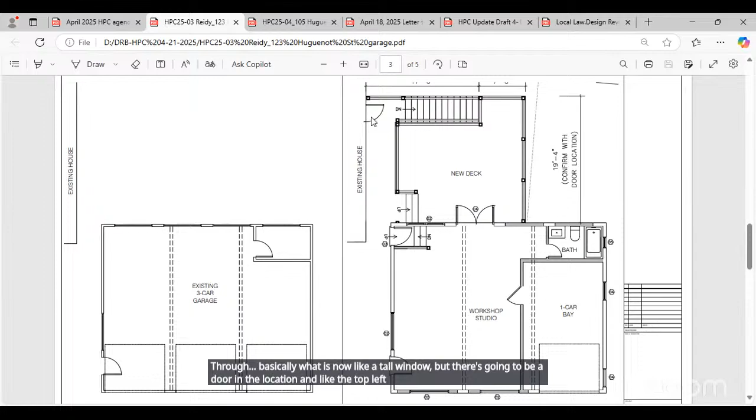Sure, where do you want to start, Shane? Well, I'll get on the side of the table. There's several design things from last month's consultation, but just to bring Tom up to speed: basically there are two phases to the proposed work. There's the new deck on the rear, heavily inspired by the neighboring Stevens deck, similar in detail but not the exact same. It connects to the main house through what is now a tall window, but there's going to be a door in that location, in the top left corner there. That's one aspect of the project, and then there's going to be essentially a renovation of the garage.

More or less, my parents don't need the 3 separate car bays. My dad's a carpenter, he wants to do work on the house, and he wants more or less a workshop.

He wants to cordon off one bay of the garage and have the rest as a workshop studio. Right now, if you look at the plan, there's an existing room in the corner, and he'd like to put a bathroom in there if possible, just so he can wash off before heading back into the main house.

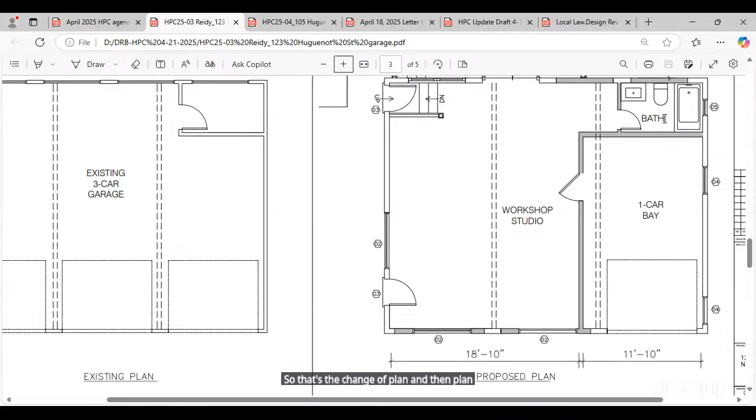That's the change in plan. On the outside, scrolling down to the elevations, there's the addition of some shed dormers in the roof to break it up. The existing front elevation has one original door to the north, which is on the right side of the east elevation, and then two replacement garage doors that match each other but don't match the original door.

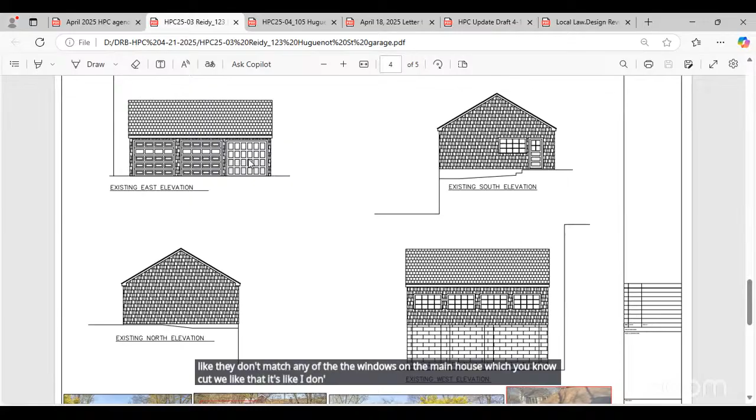There's also a series of rectangular windows with a more industrial look that don't match any of the windows on the main house—which we actually like. It makes the garage a little more interesting, so we're picking up on that window style and theme.

If you go down to the proposed elevations, we're essentially blocking in the garage doors to the south and in the middle of the front elevation, and adding some new windows to match. All the windows are being replaced, and they more or less match the existing ones, although the existing are single pane and these will be double pane Andersen 400 windows. In terms of size, geometry of the divided lights, and details, they're the closest match we could find.

I think they match pretty well, and they're awning type windows. There's also that new door in the corner of the garage, matching the existing door on the right side of the south elevation. So it's an existing style of door, but we're replacing it with a new one that matches the original.

Where the cursor is, that's a new door opening matching the existing door panel we're replacing. You can see the change in grade—the doors aren't at the same level. That's the existing grade, not natural, and there are two steps down, visible in section, that go to the rear of the garage.

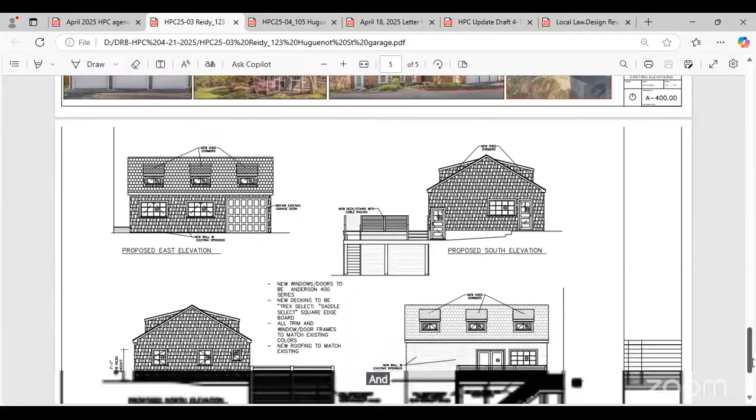Those proposed shed dormers will be on the front and back, again just to break up the roof a little without doing anything too overly designed or ornate. It's still a garage, so it should still read as a garage, but we wanted to dress it up a bit and make it nicer, and also bring some light into the space since it's going to be used as a garage workshop.

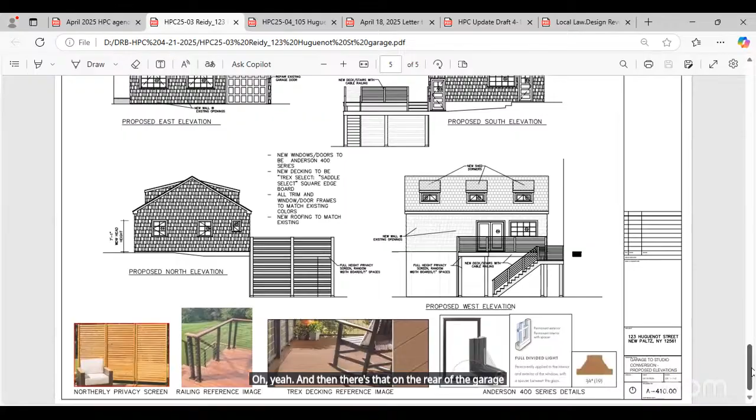And then on the rear of the garage, there would be access to the deck from the workshop space, so there's a sliding door and a new window. I think there's actually a window in that existing location right now, to the right of the sliding glass doors. We're filling in two windows on the rear of the garage, essentially moving those windows to the front. That's kind of the idea, but they'll all be new windows. That's everything.

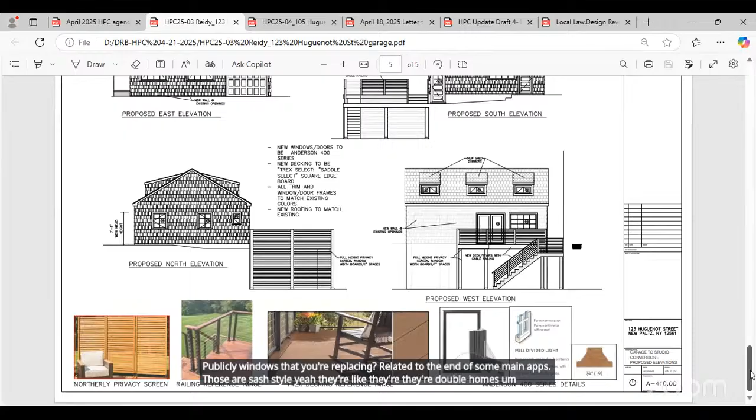How do the windows you're replacing relate to the windows on the main house? Those are sash style, aren't they? Yeah, they're double hungs. If you go back up you can see they're double hungs without any divided lights, so they don't really relate - they're different. The windows have a different language on the garage, which makes sense, since it's a different space, a different building, built at a different time.

When we were designing this, we considered putting some double hungs on the front of the garage, but it immediately looked weird because the garage isn't really becoming a finished space that's part of the house. So to continue any of the details of the main house felt weird. We just focused on the existing details in the garage that we wanted to move forward and lean into for the design, and continue with that design language.

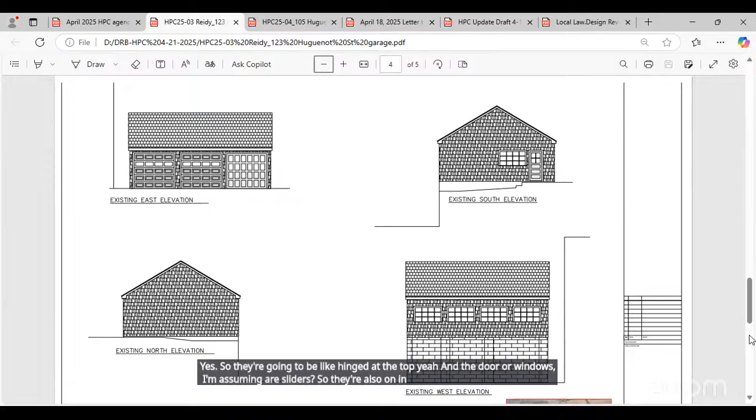And you mentioned the windows are going to be awning style. Yes, they'll be hinged at the top. The dormer windows, I'm assuming, are sliders or casements? They're also awning windows. Because they're not that large, in terms of getting maximum airflow... I'm not sure how often they'll be used since they're so high up, and we're not planning on putting automatic openers or anything. It was more so to match the existing awning windows and have a similar geometry for the divided lights - just keep the same details.

Because I was looking at the Anderson picture windows, and they had different size frames than the awning windows. So I figured even if these are just set in place and never opened, the details will match more exactly with the rest of the windows on the building.

Thanks very much. Mr. Reidy Senior, is there anything you wanted to add? No, I think Shane described it very well, better than I would. We're just excited about moving forward and making that garage look more aesthetically pleasing from the road also, you know.

Is there any HVAC plan, like a mini split? No, actually, not as of right now - it's a good question, not part of this application. Although, I mean, now would be the time. I guess there's a good location for the condensers under the deck, because that's going to have a privacy panel.

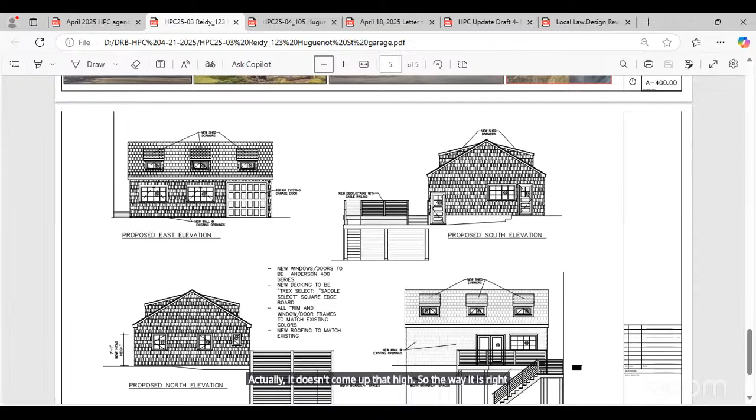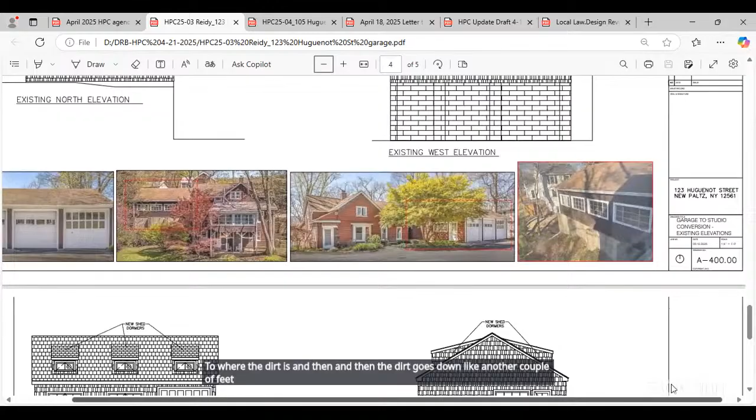Right now, where that deck is, the dirt comes almost all the way up. It actually doesn't come up that high - I think you could just hang the deck on those built-in piers, or maybe just bolt in a bracket there, and hang it off there, because the dirt comes up not even halfway. I think that drop is like 10'6" or 11 feet to where the dirt is, and then the dirt goes down another couple of feet. It's not at the same grade all the way along the back.

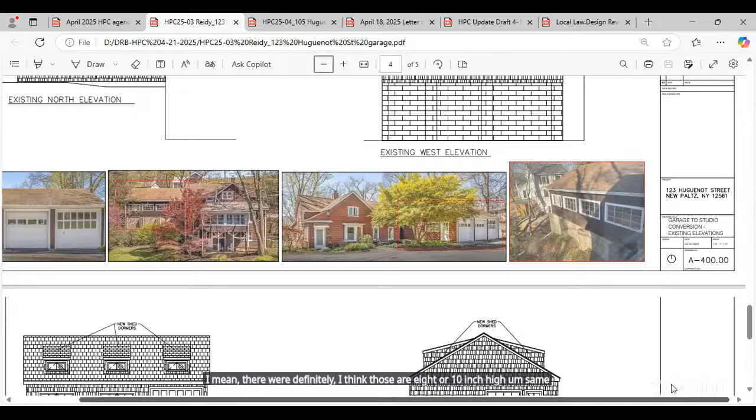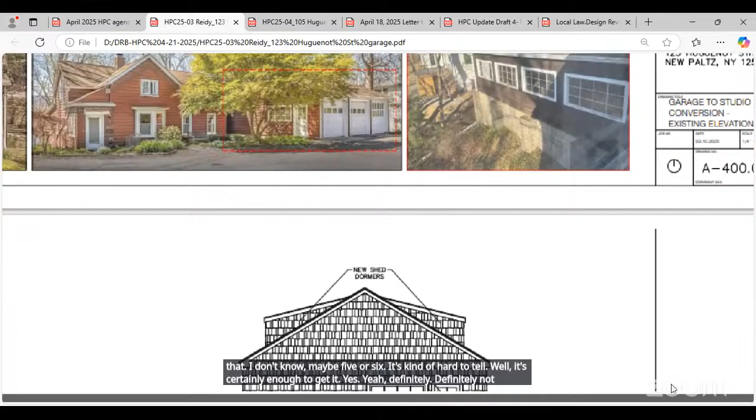There's a pretty decent amount of height of just the bare CMU wall - those are 8 or 10 inch high CMU blocks, so if you count the courses, maybe it's at least 7 or 8 feet for the most part. Even where the grade comes up lowest, maybe 5 or 6 feet. It's hard to tell, but it's certainly enough - definitely enough to tuck a few condensers, if that's something you'd want.

Yeah, but it didn't make it to the drawings. I guess we gotta take a look at it, but I guess that's where it would go. Maybe we revise that for the public hearing.

Yeah, it was just in the application, almost just pure curiosity, but I find it useful. Even if you, yeah, just plan for it for some eventual need. Something like if you're pouring footers, then pour a pad in anticipation, because it would be pennies compared to what it would take to do it later. Yeah, that's true. So maybe we update the application right after this and update the drawing.

Because the next step would be setting a public hearing, right? Yeah, for the next one. That's probably what will happen.

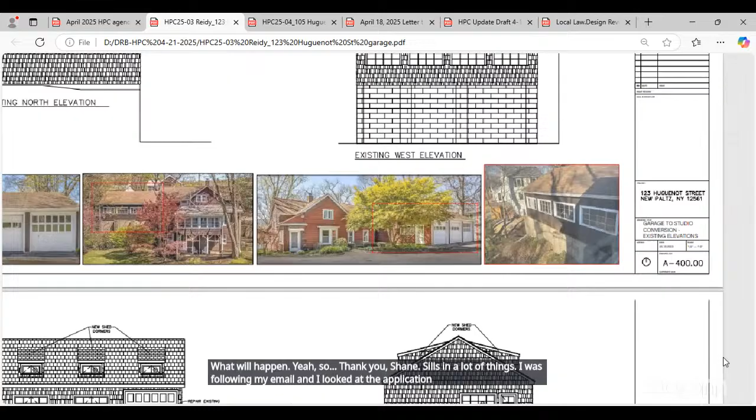Thank you, Shane. That- yeah, no problem. Fills in a lot of things. I was following by email and I looked at the application, but that was a great narrative. Yeah, no problem. Does anybody have any questions or comments?

Well, looks good. It's great. And the shingling is gonna be natural or?

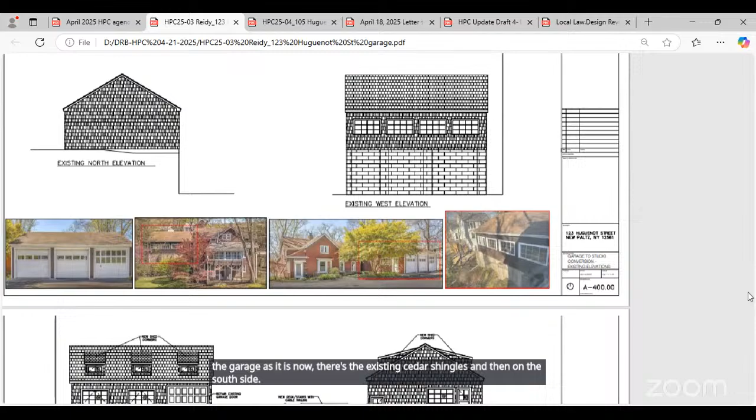Yeah, so actually that's something I forgot to mention. Right now there's aluminum siding covering the existing cedar shingles. So on 3 sides of the garage as it is now, there's the existing cedar shingles, and on the south side, you can kind of see in that center photo, the south side of the garage has the aluminum siding that the house has. So the plan is to take that off and restore the existing cedar siding, depending on what shape it's in, replace it as necessary or just paint it.

The cedar siding around the rest of the garage is in decent enough shape, but I think we're gonna have to replace a decent amount anyway, or infill where we're filling the 2 garage doors, as well as those 2 windows on the rear. So that's gonna be new cedar shingles. Maybe at that point, just replace the whole garage this way, so it's all the same age and same condition.

I guess you'll know when you take the siding off. Yeah, we put a different kind of siding off our house some years ago, and at that point it would have been about 100-year-old cedar, and it's mostly not replaced, here and there. So you may have a pleasant surprise waiting for you. Have you taken any of that off? No, I haven't taken any of it off. Yeah, so I guess we'll find out.

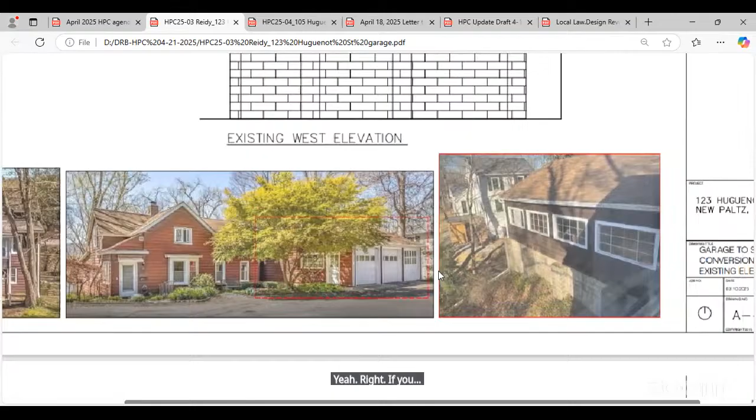Terrific, so we've got our vote, 4-0, for the May 12th public hearing.

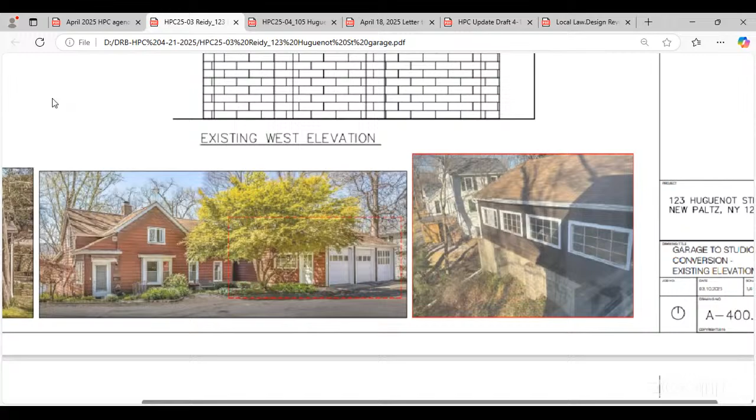Everybody, let's go to our next item, which is Mr. Hardeep Singh at 105 Huguenot Street, HPC 2504. Mr. Singh, would you like to come on up to the table?

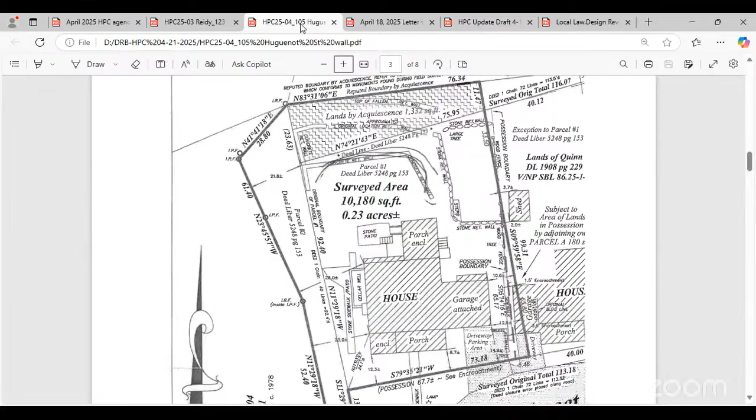Oh hold on, we have that, hold on a second, hold on. Need help? Again, welcome, thank you for coming in person. It's so much nicer to talk face to face.

If it's all right, I'll characterize what Camille and I observed when we did a site visit 10 days ago or so. Having received the application from the building department, Mr. Singh and I had a couple of emails back and forth just to better understand the condition of the wall. Camille and I made a visit to the site that you're seeing here and confirmed definitely that the wall is degraded, particularly on the left side of what you're seeing. We also carefully peered over the edge of the wall to see that there's a supporting wall. I don't know if we have a photo that shows that.

That is quite low, yeah. This will give a better sense - it's about a 10-degree lean, which is starting to be dangerous, I think. The natural stone is sitting on what appears to be a poured or cinder block base, about 4 or 5 feet down. Does that sound about right? So it's very uneven - when we had the person who wants to help us with the wall, he showed that in some places it's 3 feet and some places it's 5 feet, so it's kind of uneven.

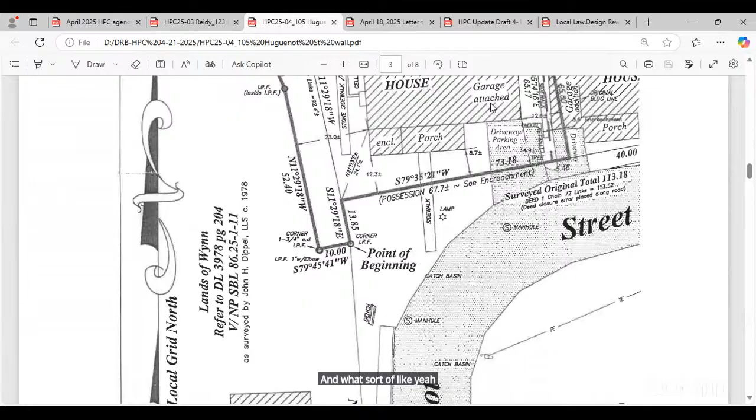Okay, please see the site plan. I was curious to just remember how much your land extends past the wall. Yes, and what I should see. Yeah, and I can go up a little bit, I guess. Just that we... yeah.

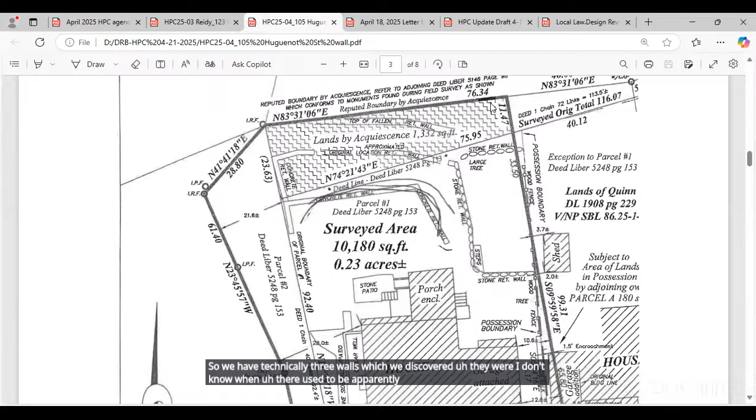So we have technically 3 walls, which we discovered. There used to be apparently 3 steps. So there is the first wall which you are looking at, which we are trying to repair. Then another 6 feet down, there is a lower level, another 6 feet, another wall. And then there is another wall, which usually most of the time goes underwater. The rain comes in. So there are 3 steps.

After the 3rd wall is where the property ends. And the current retaining wall is much closer to the house, like the pen marks. So that's what I did, because I was trying to show someone the curve that the contractor is saying to do for the wall.

That's wonderful, that's better than I hoped that you've got. Yes, plenty of room space. Yes, yeah, I mean we have.

We thought about at one time, if we are doing the retaining wall, rather than just that, we can reclaim a little bit more of a yard, since our yard is not very big as you've seen. But it becomes a very enormous project to fill that much stone and build more land. And it always settles, you'll end up doing it again.

And the level that you find first, that's... no, just on the proposal that I got from a few people to do the current wall, it's quite enormous, so I don't know.

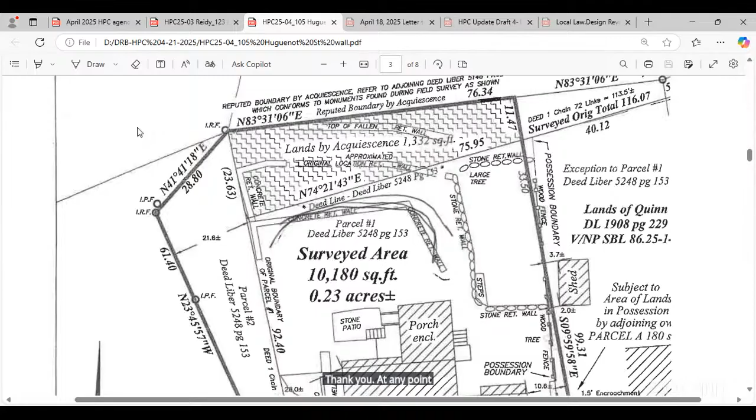Just one last question - what's the process now? Do I have to go to the...? Valerie will communicate our decision tonight to the village, to the building department, and from that point you should be able to get a permit, and just follow up with the building department. Great, thank you. If at any point we can help, call on us internally at this point. Okay, have a good one. Thank you.

Thank you, everybody. Let us move on to the design review of the evening. We're going to discuss 147 through 159 and 151 North Chestnut Street, Westview Development LLC, with some updates on the project from the planning board.

Will there be any screen sharing? Will Carol want to put images up, or should we use the one you sent? Carol, I'll leave that to you. I can share the screen. Okay, let me stop sharing then, it's all yours. Okay, that would be great.

I believe it was October that we saw each other, and issued a positive, generally positive, but also very preliminary design review report.

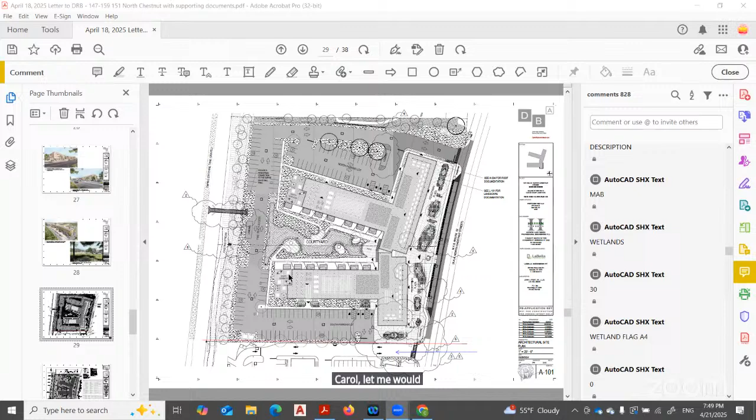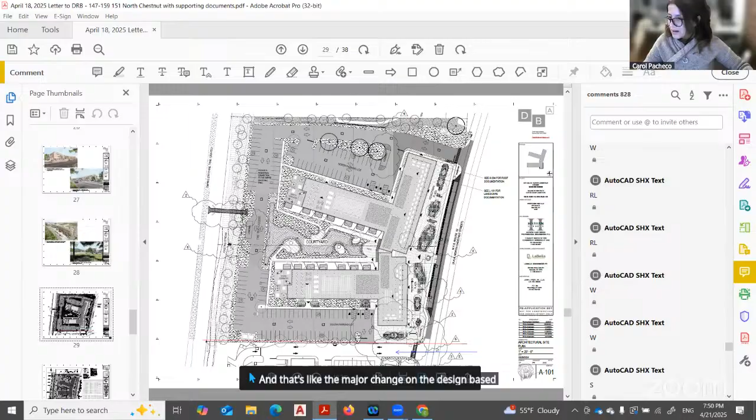Carol, would you like to narrate through? Yeah. So the last time we presented to you was last October. Since then, we got a neg dec on SEQRA, and we also got the side yard setback variance for the north and south side. That's the major change on the design based, to obtain that reduction on the setback. We elongated that south portion of the building, and we also have a shared driveway with the Agway project now.

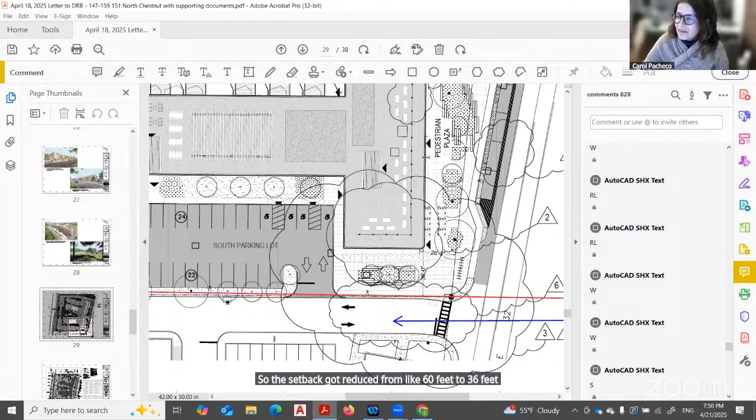So the setback got reduced from 60 feet to 36 feet, so that facade was elongated by 24 feet. As you can see, we have kept the pedestrian plaza, and now it wraps nicely to that corner. With those changes, of course, the layout got updated as well. Let me share that.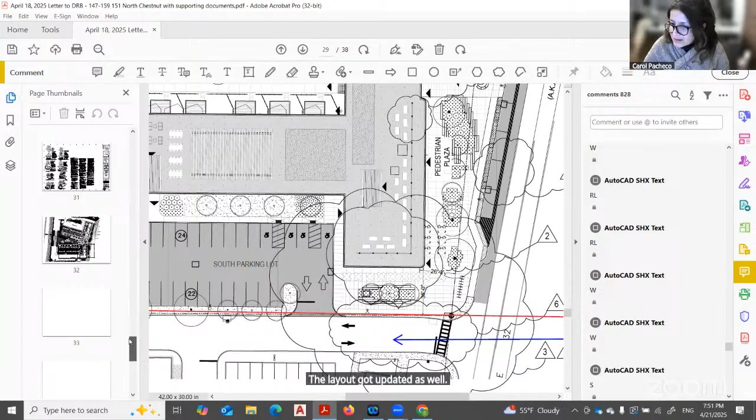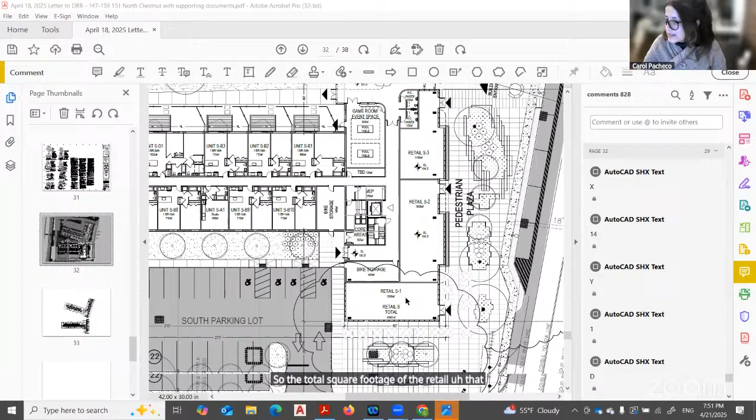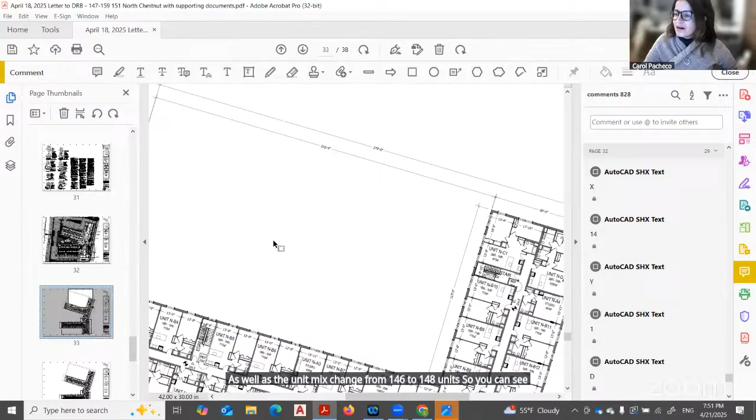So the total square footage of the retail got augmented from 7,500 to 8,700 square feet, as well as the unit mix change from 146 to 148 units. You can see those updated, highlighted on the plans as well. So one unit per floor we increased.

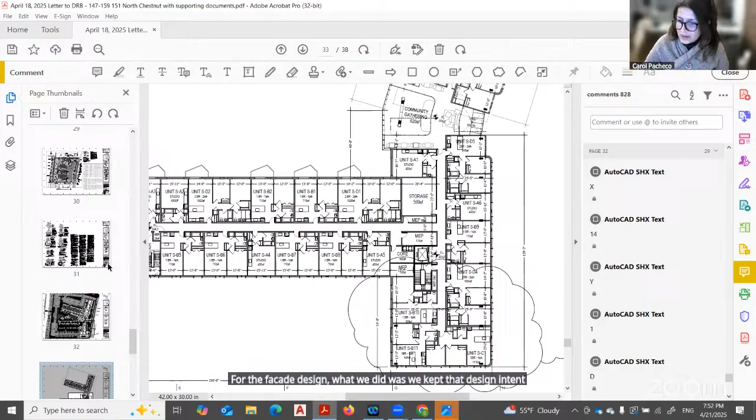For the facade design, what we did was we kept that design intent as we had before. Let me share those renderings. As you can see on the upper corner, this is the portion that got elongated, 24 feet. So two modules of this window units got augmented.

Also, concerning one of your comments about that railing, we set it back from the edge of the building further, and we decreased the height of that railing as well. We kept that rounded corner that the board also commented on positively. Those are the major changes on the architectural part.

Mike, if you want to chime in on the civil part. Site-wise, I think the last time you saw this, we had a very generic landscaping plan. That's been fully developed now, with specific species.

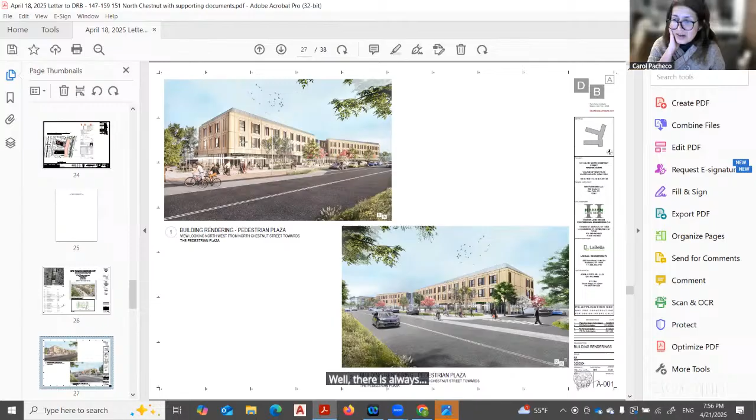Well, there is always a Hardie board, kind of like that had that wood tone. So we might go in that direction, but we always can give you a specific direction on that at a later date.

Yeah, I think that's pretty fundamental to what our job is, to make sure that the materials are of quality.

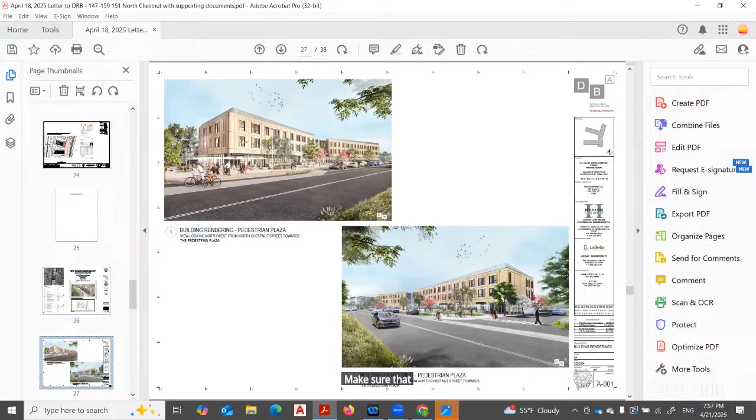Okay, so Carol, I heard Hardie board, but I missed the other option. No, that was, for now, that will be the main direction it may happen like that. But we can always go back, because we need feedback from the developer and the client. We can give you more detail at a later date. Sure, that would be great.

And I think it might be helpful to have a detailed section as well, once we get to that point and know what you're proposing. In October we had quite a discussion about making sure there was profile around those windows, and it looks like that has been followed. That's good. But we should definitely plan to circle back once you've done more thinking on that.

I don't necessarily have to run through my list. Do other people want to ask things, sort of take turns?

That was the main concern I had too. As I said in October, I think it's a really handsome design. Honestly, I really like it. I like just the details, the way the metal details and the wood details are distinct and come together nicely. And I like the kind of faceted look.

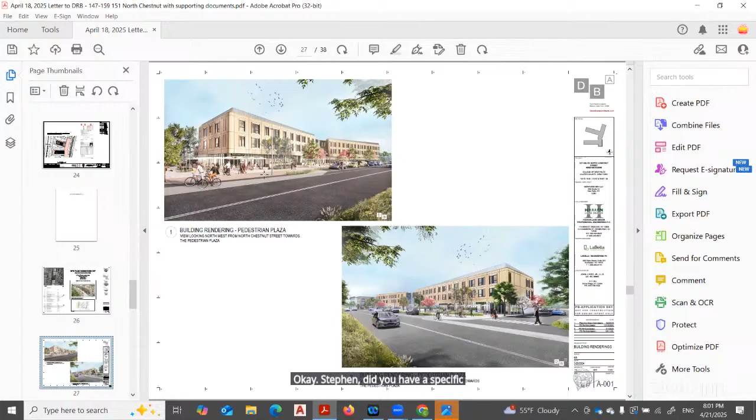There were comments from both the planning board and public during the public hearing about providing screening, mainly from parking, to the rail trail. It's robustly planted with evergreens along that stretch. I was seeing hackberry, red oak, eastern hornbeam, basswood, gray birch, yellow birch, and others.

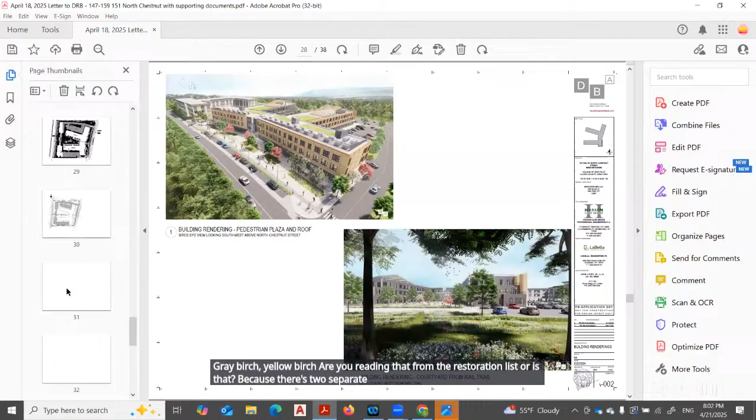Is that from the restoration list? Let's see, because there are two separate planting plans going on - there's a restoration plan which is more about habitat and stream. That may be exactly what's going on, but I'll definitely double check. I was reading it from page 30.

Is there a landscape architect you're working with? Yes. I don't want to push too much, but is there a possibility that when you get more finalized in the plan, he can do a presentation on landscaping? Thoughts? Absolutely, that'd be good.

That's a concern, if it helps - we've had this conversation with the Langley project next door, and it was a pretty easy conversation because everybody understood that the swing of headlights is, for some months of the year, going to be really intrusive. So we talked about possibly berming something up a couple of feet, and then, as Camilla said, not making everything deciduous.

But it could well be that I was misreading page 30 of that. I think that's something the neighbors on the other side of the rail trail are entitled to our scrutiny. And it sounds like you're quite on board. So let's plan at some later date to have a landscaping presentation that really addresses that issue. The rest looks robust and really thoughtful, as that does too, except we've got to keep thinking about the neighbors on the other side.

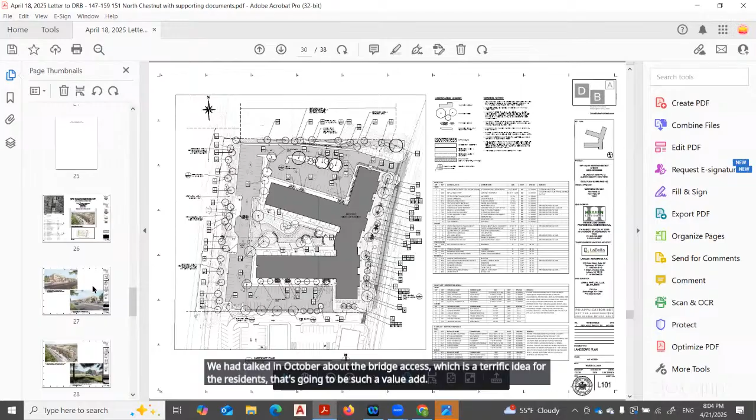We had talked in October about the bridge access, which is a terrific idea. For the residents, that's going to be such a value added for living there. It's a nice design also - a very nice design. You know, it's good in every way.

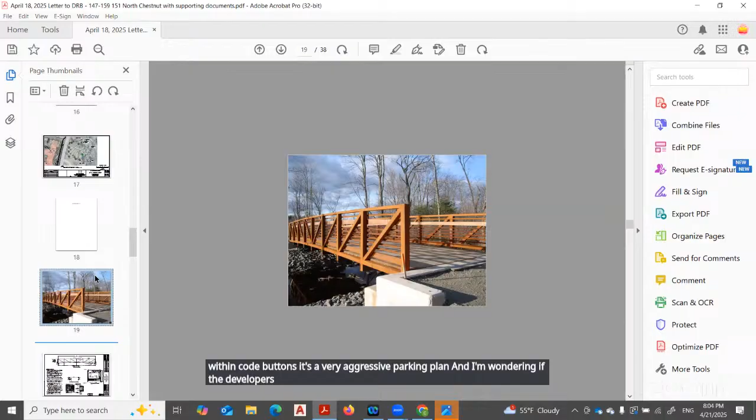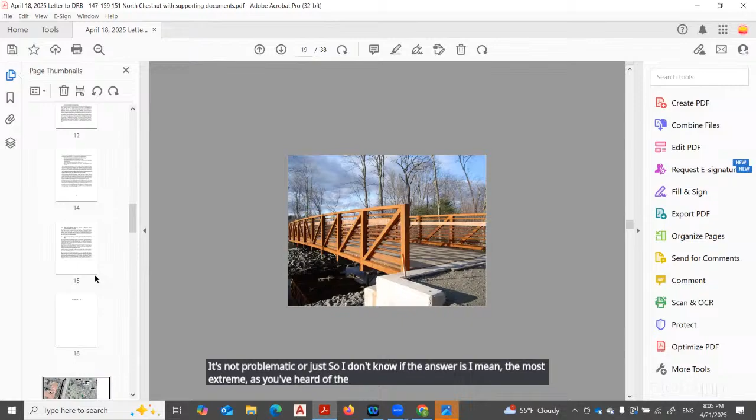But it did start me thinking - the parking is very, very tight. I know it's within code, but it's a very aggressive parking plan. I'm wondering if the developers are considering that non-residents might want to access the rail trail from that parking lot, which would exacerbate what's already found to be very tight, if not problematic, parking. So I don't know if the answer is - at the most extreme, as you heard at the planning board, reducing the number of small units to get maybe more families for the square footage - that's obviously a pretty big redesign.

There's also the possibility of numbered parking spots, where right now it's pretty clear you could just park anywhere, with aggressive language about being towed. I think it's a possibility with both of these projects that people may want to just come and park closer to the rail trail and hop on. Well, they're going to want to, and they're going to - that's most likely. Whether it's signed, if it's prohibited or not, or sort of key-gated.

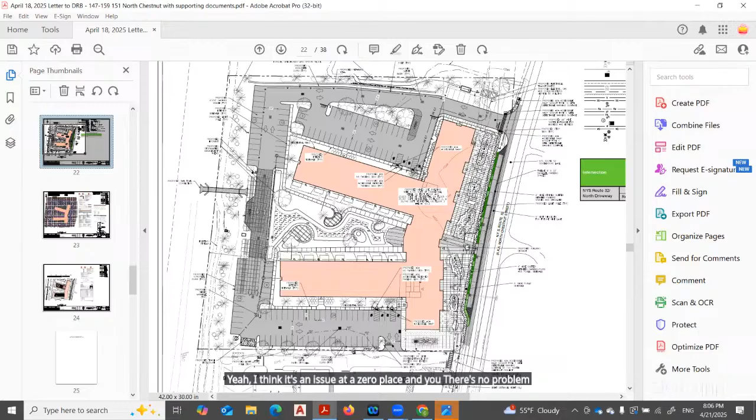That would be the option. I think it's an issue at Zero Place - you go there and there's no parking for tenants, it's full on nice days. Do they kind of assign parking at Zero Place? So it's understood during the day that that parking is eligible for the commercial. At Zero, the signs say 2-hour parking for the shops or guests, but people are parking long term.

Yeah, you're right. So that is kind of the warning sign - like what you said, people will try to do it. And it's really the planning board's purview about whether the parking ratio is workable or not. To me it looks aggressive to the point of dangerous, but that's not our purview.

Let me see if there's anything else I want to ask about. I think, with Shane, it's a very good design and coming along nicely. Oh, I'm sorry, I didn't ask about

the railing at the top of the building - so thank you for pulling that back. And the letter we received indicated that it would be steel or aluminum.

Is it going to be custom? I'll just say that the solution at Zero Place with the kind of modular, basically piping, was not a good solution. We had no oversight over that and would not have said yes to it, I don't think.

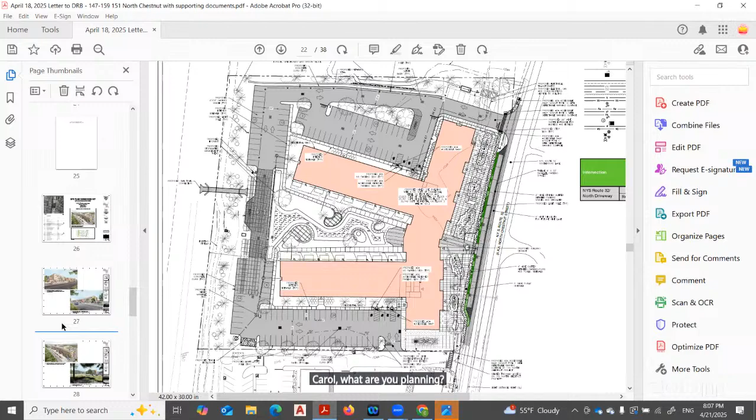Carol, what are you planning there? We are proposing aluminum or steel for the railing, but also consider that we have a parapet that is a continuation of that facade. So in a way you're not going to see the full height of the railing, it's pulled back, and it's also going to be covered by that extension of the parapet of the facade itself.

That would be an example of a detail we'd love to see at the next meeting. Let's go in tight on what you have planned there. Yeah, I think that same wall section that we asked them about. You pick up both of those.

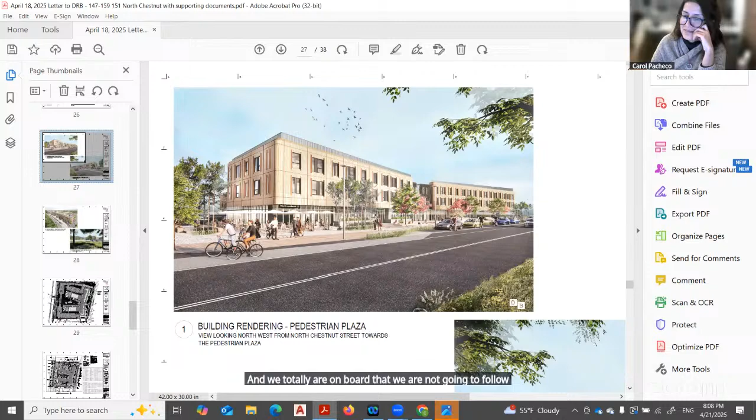And we totally are on board that we are not going to follow that awful example of that railing. Good, we're on the same page. Alex, anything else?

We'll be happy at your pace to have another conversation. Just to recap, we would definitely like to know what facade material is being planned and want to see detailed drawings of that, especially the rounded corners, key areas such as the retail shop fronts, the window surrounds, corners, and then the railing. And separately, a landscaping presentation focused on what the mitigation strategy is going to be for the rail trail.

And then the parking, that's a planning board issue, but I think it's something you want to talk about. Yeah, we'll look into that. Our colleague Bill, who had to leave, made a point that he was asking our planner if we could start to see a bird's eye view of what North Chestnut is becoming, because what's happening here is we're seeing individual projects, but there's also a cumulative effect on a nice sunny day. People wanting to get to the rail trail, and all these new developments could be subject to those pressures.

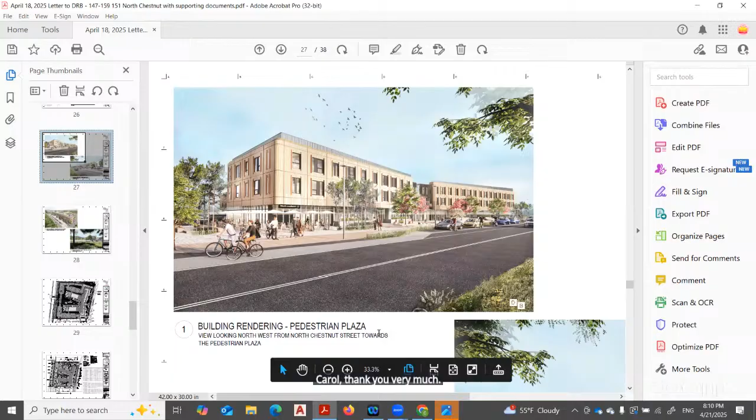Everyone, that's the big business for the evening. Let's go to design review quick report. George, you go to the update from 199 Main? Yes, so...

Siding has been delivered there, it's that LP siding we're putting up, no clapboard, 6-inch exposure, so it should be starting in the next few days. And one thing that's nice is that when they removed all the aluminum fascia and the vinyl soffits, there were exposed rafters for the overhangs, so Sturberg agreed to leave them all, replace the rotted ones, and they're going to paint all that. It'll be a nice detail over the overhangs.

That's one. Boy, it's such a case for why you don't put soffits over beautiful architectural details. Yes.

And last, as per Tom Olson's recommendation, Mr. Burley's going to leave the brick steps, the stoop, and it's all going to get repointed, power washed, and he's going to put bluestone treads on top of it. So beautiful. Yeah, that's good. Again, it's going to set a new standard for that part of the industry.

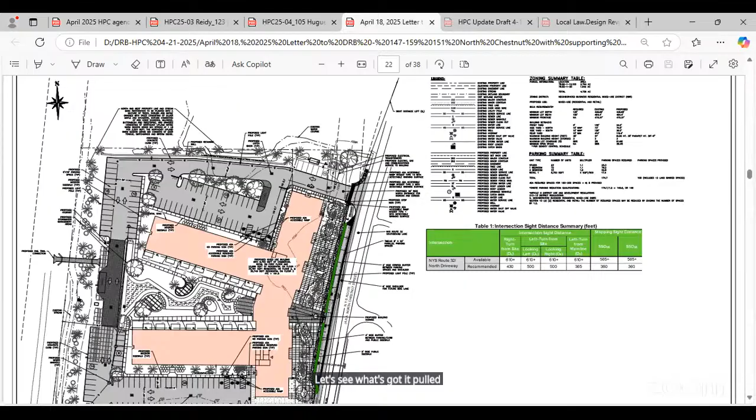Steven's got it pulled up actually. I think the V shape helps a lot, yes, definitely. It does, that V shape coming out helps that long stretch, and the variations on the windows.

But yeah, it's a big building. It's a big model, it's a big model.

This is a question - well, that's a B though. It's probably the biggest building in New Paltz, I think it will be. Maybe outside the campus, maybe, but maybe the campus.

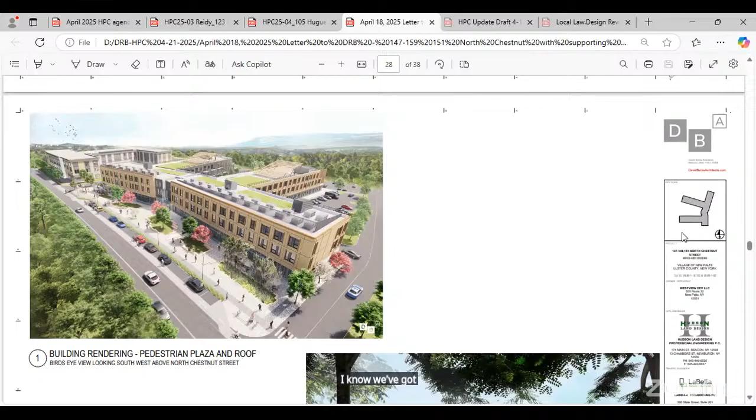Well, I kind of think there's a new vernacular being established. And we're also up against a desperate need for housing, right, so.

But then we talk about the fact that these apartments are very small. You can't really live there other than as a single person or maybe a young couple, they're mostly kids, one bedrooms, and lots of people live in one bedrooms. But then it excludes families. I would like to see working families.

You know, we're in need of housing, but more reasonably priced housing. And with the cost of construction, the cost of materials, the interest rates, the cost of development infrastructure, what these guys have to charge for rent - you're absolutely right.

You see one bedroom apartments going close to $2,500 to $3,000. Wow, those are like metro area prices. In metro areas now, a one bedroom apartment - he just told me, down on 10th Street on the east side, in her building, one bedroom apartments, 800 square feet, go for $6,000.

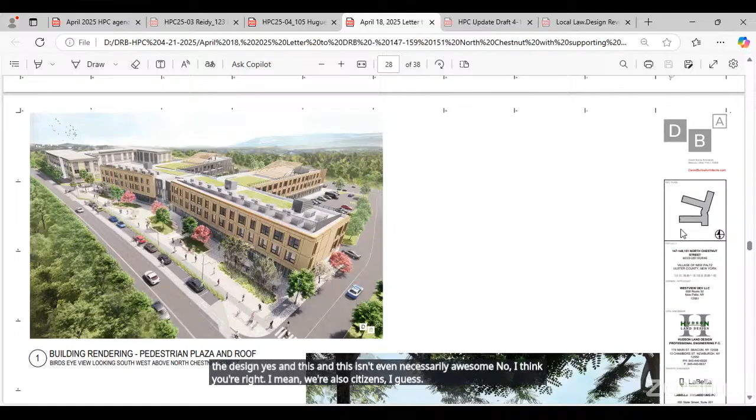I didn't mention it, but I think going up to 4 stories is going to be just a little... it's probably too late now, and maybe they never considered it. I know there was a lot of pushback with the other project about the height there.

It's just something to be thought about now. With the variance and the longer building we're looking at, it's kind of relevant again. I think it makes sense to mention it in the report, because if more projects come forward, it's something we could think about.

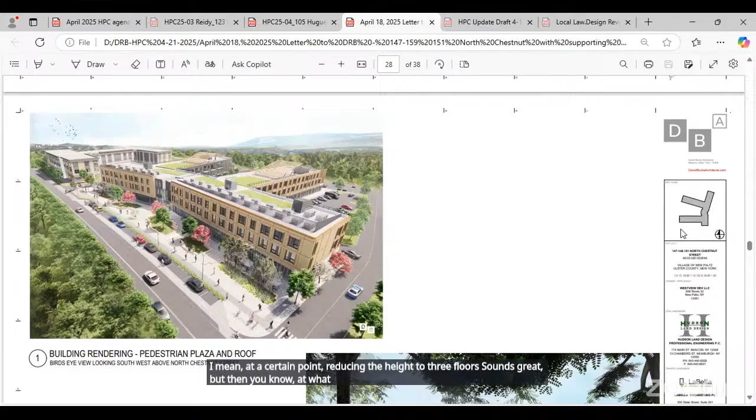We could have given our opinion to them back when they first came in, did you consider that? At a certain point, reducing the height to 3 floors sounds great, but then at what extent, at what length of a building would it be preferable to actually start going vertical?

It seems like, to save on lot coverage, somewhere between the previous and the side yard variances now, the building is getting long. It was long already, but maybe an extra 20-some feet on each side is not enough. It's just the one side, a little bit south — 24 feet. That's a lot. I'll mention it, it's basically just a mention.

Back to the art show — it's easier. Sorry, topic switch — our submissions will start at the end of this week, on Friday.

In that time, I will spend all my waking hours on the library. Hopefully, with the help of the show, we secure 2 judges — Peter Fairweather, who won last year, and also Maureen Rogers. We are still looking for a 3rd judge, but I think it will come together by the time we need it to.

So I hope you want to come to the reception on May 31st, Saturday — please try to get that on the calendar. Wait, May 31st, you're away. May 31st is Saturday, it's the Saturday after.